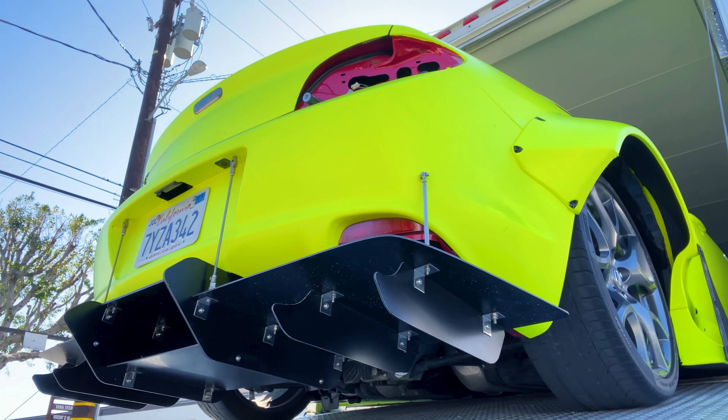Finally getting the air management system on the Brat Bunny. We are at Entice Motorsport to install the new AccuAir Endo-CVT system. Where's John at? There he is, he's running away.

There is actually a lot of electrical work in addition to the plumbing that needs to be done for the AccuAir Endo-CVT system. Instead of having your trunk be really messy with compressors and lines all over the place, this system by AccuAir is self-containing everything in the tank.

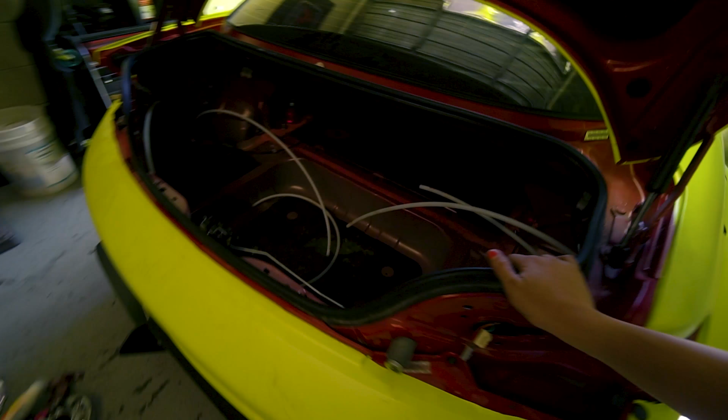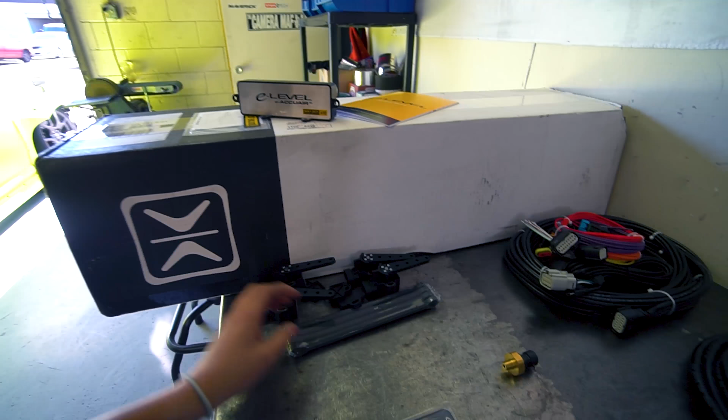We have temporary lines in right now. This is the big day that I've been waiting for. I did lay some of this stuff out already. We have our wiring here, the tubing for all the plumbing, some hardware fittings, our touchpad, and here are our height sensors. This is the ECU for everything, and this is the tank. So I actually got the 5 gallon over the 3 gallon. I measured my trunk and I had enough room, so I figured why not? And it's aluminum, our aluminum tank with the raw finish.

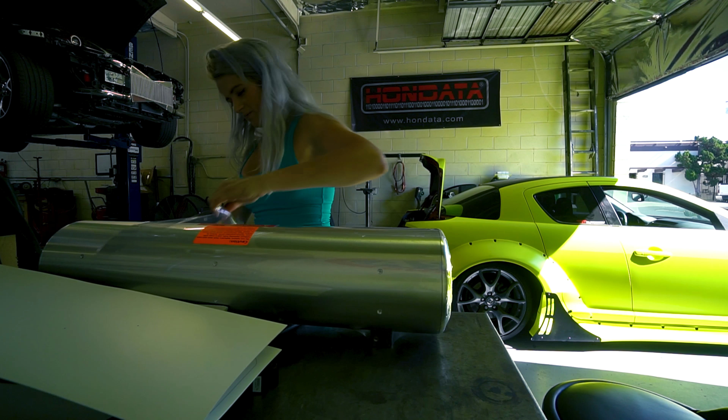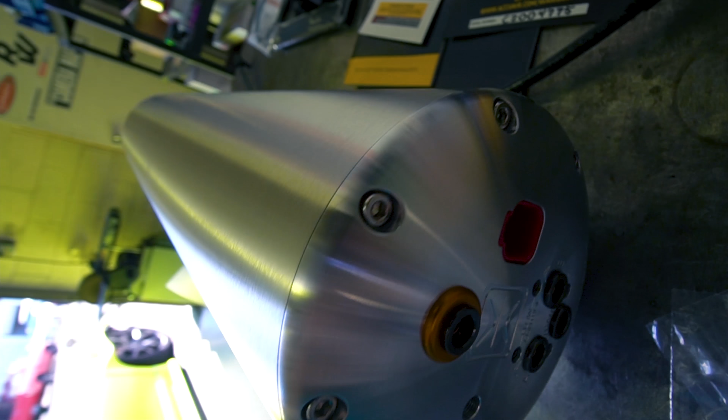Aluminum 5 gallon tank from AccuAir. This is their Endo-CVT. Everything is internal, which is amazing, and this is why the back of the car is going to look so much cleaner than the ones currently on the market. They usually have a lot more plumbing and wires coming out and the compressors externally. So this one has everything self-contained inside.

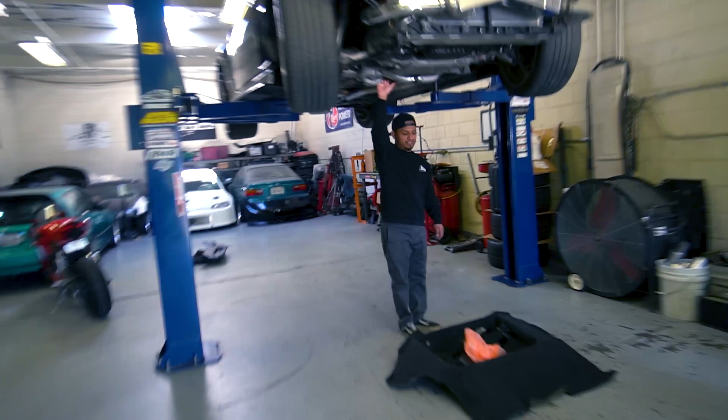So inside there are 2 Wabco compressors. You've done a couple of these, right? I've done a couple of them. I think I helped Dustin out with one, and then I helped a friend do one. They're pretty cool systems, I like it.

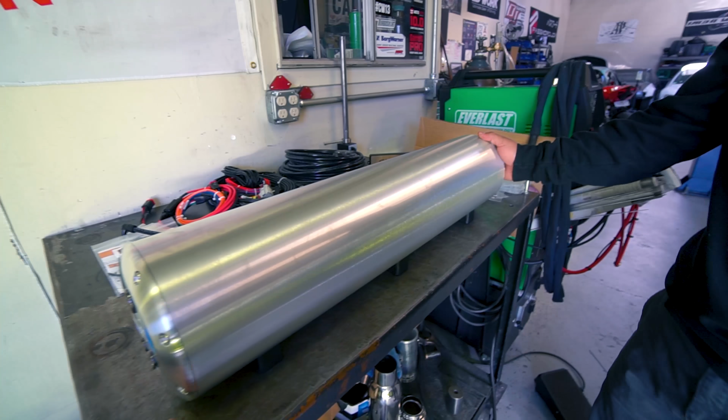There's wiring, there's plumbing, and then there's also mounting hardware with the E-level sensors, the height sensors. And getting everything to talk to each other. Dude, this system's awesome, it's really quiet. As opposed to the system I have in my car which is really annoyingly loud. These things are quiet as hell.

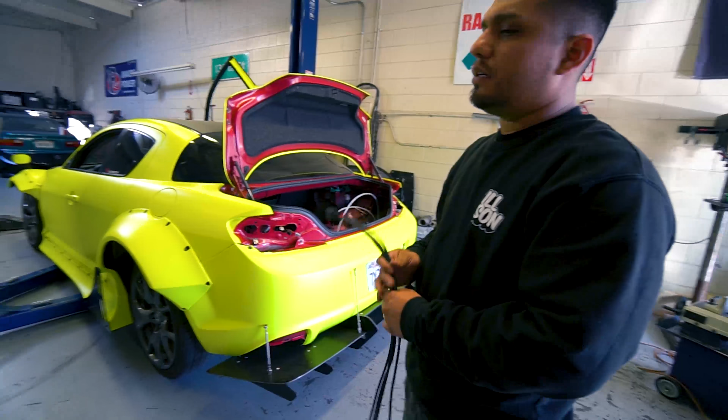Right now we're not going to worry about making anything look pretty, we're just going to lay out everything where it's supposed to sit. All right John, what are we doing? What are we starting with? Well, we're going to have to run this wiring for the height sensors. So, set up everything, all the wiring in the trunk, run it from the trunk to the front, to the rear, and just start working our way from there.

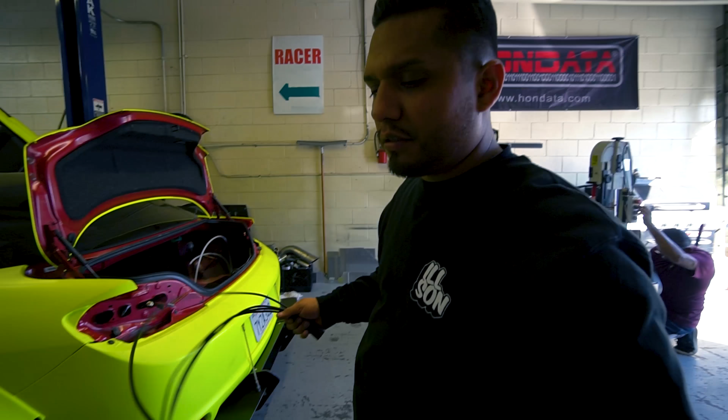We're going to be drilling a hole through here to route everything through so that it's routed evenly from each side. Damn.

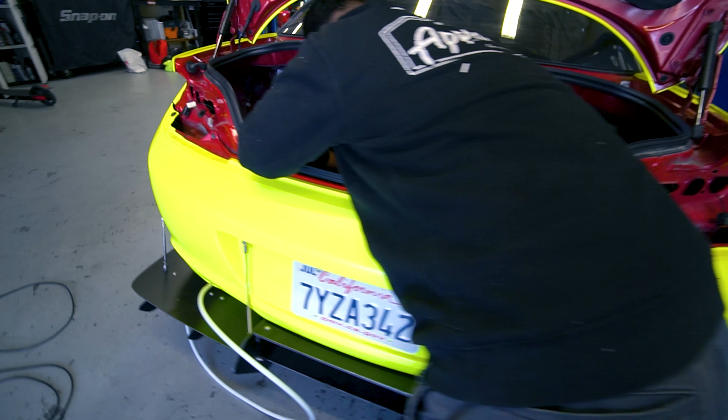I always say I don't really understand how there's not more girls working on cars because we can fit everywhere. I have small hands too. I don't get how guys do it sometimes. I know, I feel fat working in there.

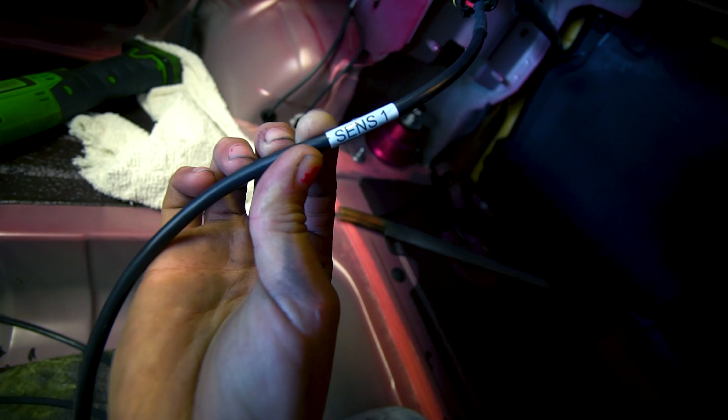That is all clean. Now I think John's going under the car and he's going to pull the wires through. The longer ones are going to the front because they have to travel further to the front of the car. The shorter ones are going to the rear, and they're all labeled on here as well. Sensor 1, then we have 2, 3, 4.

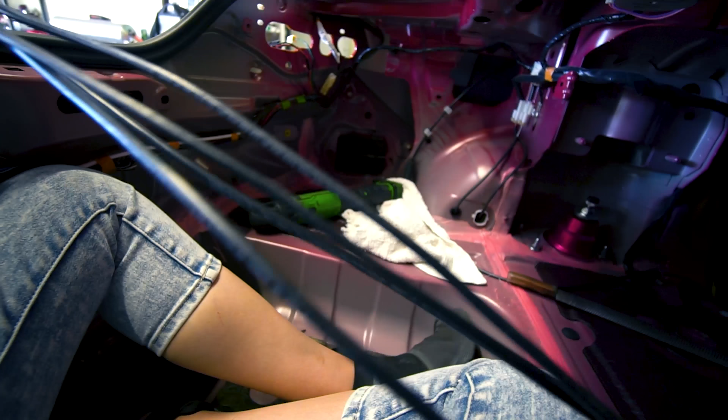It's just the height sensor wiring and the airline, those are going to be the only things you run underneath the car. Okay, everything else can be from in here, and the power wire straight to the front. Everything else, all the modules will be here. It's pretty simple, okay.

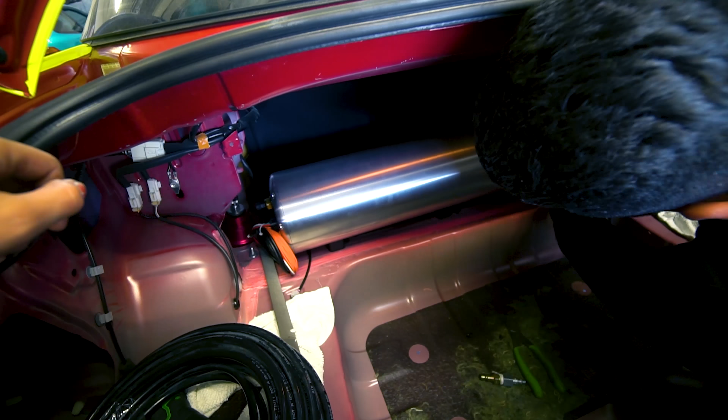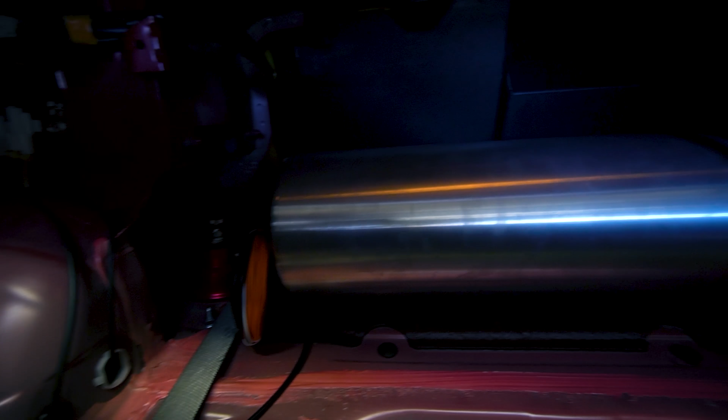This connects to the actual module itself, the little ECU type thing. And then that is hooked up to this, and it pretty much, you've got the left side of the car lines coming out here, and the right side of the car lines coming out here, the air lines. This just tells the module what each wheel height, what each shock height is. You've got your power wires here, and then all this goes to the module.

I still don't know what I'm doing with the trunk yet. I know eventually I'm going to put maybe some amps or subwoofers, something in the back, but I don't have any of that stuff yet. So at this point, the main goal is to just get everything mounted, the system installed, plumbed, wired, and working, and then eventually we'll move on to doing a full design for the trunk. But for now, the priority is just getting this working.

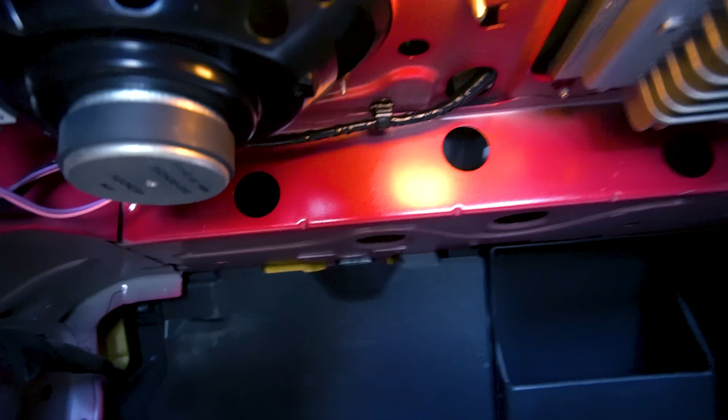We'll mount one here, it'll be there. And then we can even run the wire through here, through this hole, so you can't see it. And then we'll put the other module right here on the right side of that. I'm so glad the 5-gallon fits perfectly, like we're not even really pinched on each side, and that's the largest one. It just looks massive on the outside of the car, and then right when it's inside, it doesn't look as big anymore.

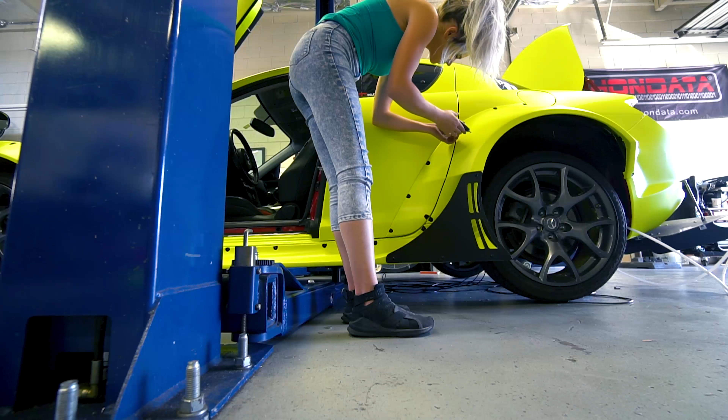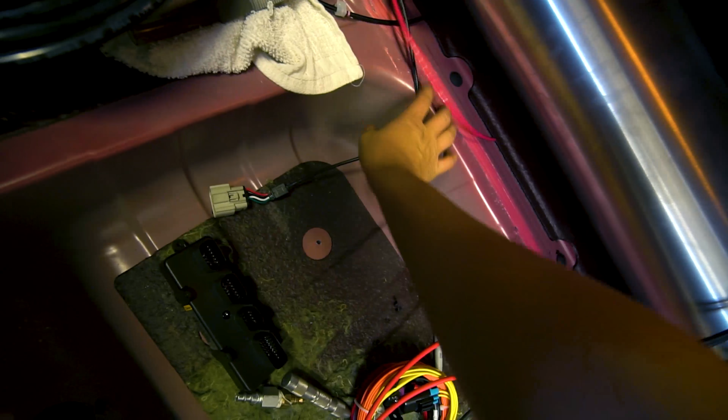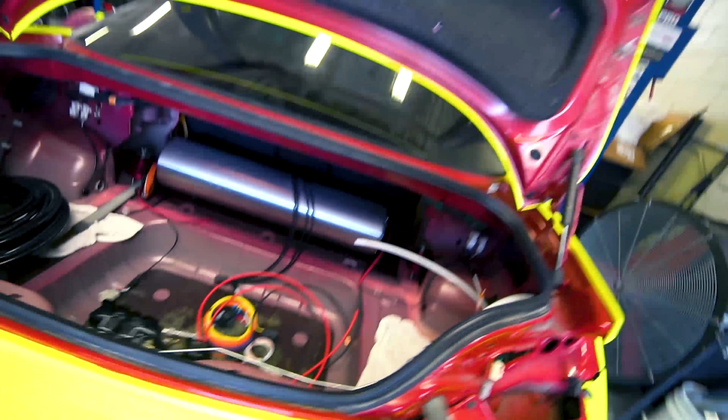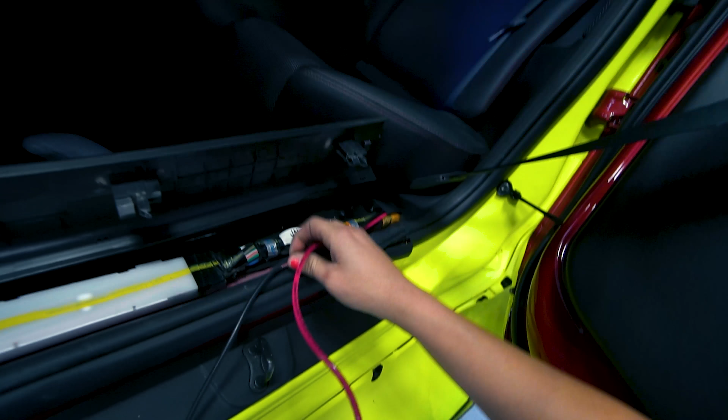We are running two wires to the front of the car through the side panel, pushing them through the back seat, down the side, and into here. One of them is the wire to the battery. The battery cable that came with the kit is a little too short, so we got some wire as an extension for it. This is the battery extension we're routing the same way as the wire for the touchpad. We're going to zip tie all of this, following it all the way up. The battery wire goes to the battery, and the touchpad wire routes up here and through the center.

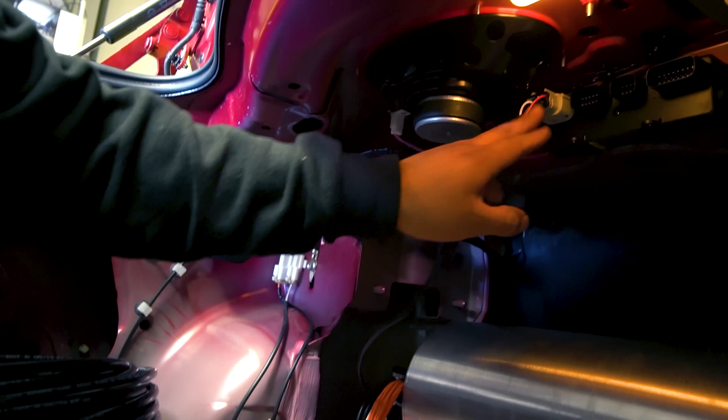The plug for the touchpad goes all the way on the left. The plug for the height sensors is the second one.

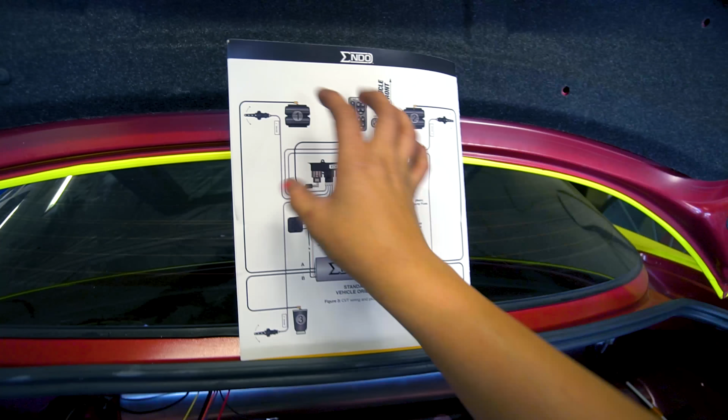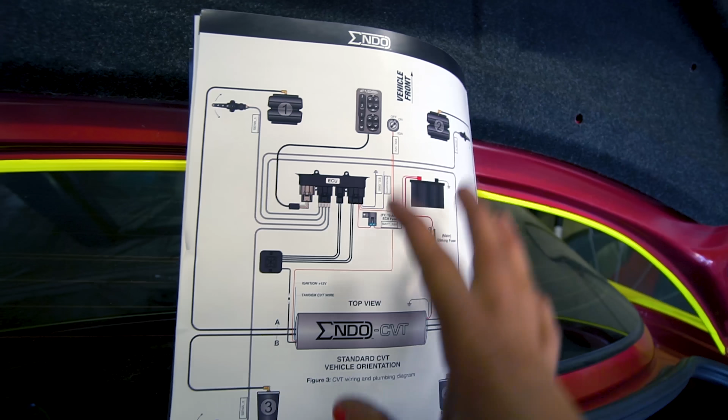The next thing we're doing is laying out all of the plumbing and wiring. That's the plumbing for the actual air struts in all four corners, and the height sensors as well in all four corners. All of that needs to be routed individually. Right now we're just lining this up and mocking it up, not fully installing it. The only place we're fully installing it is at the tank, so at least the tank will keep everything organized, and we can zip tie it at the end here before making the final connections. That's our plan of attack for the airline. For the height sensors, pretty much the same thing—we're laying out the path through the car, not fully installing it at the height sensor, but zip tying it for now to get it in the right place. So we have the four wires right here: one and two go in the front, and three and four go in the rear. They're all going through the hole we made initially, so everything is plumbed through there.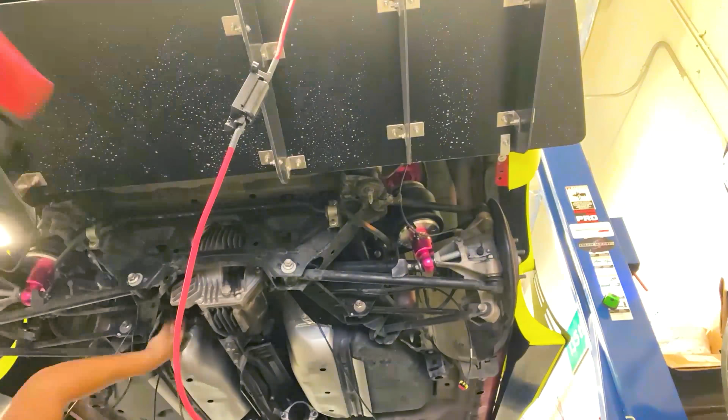Now we're starting on plumbing the air line, really just routing everything.

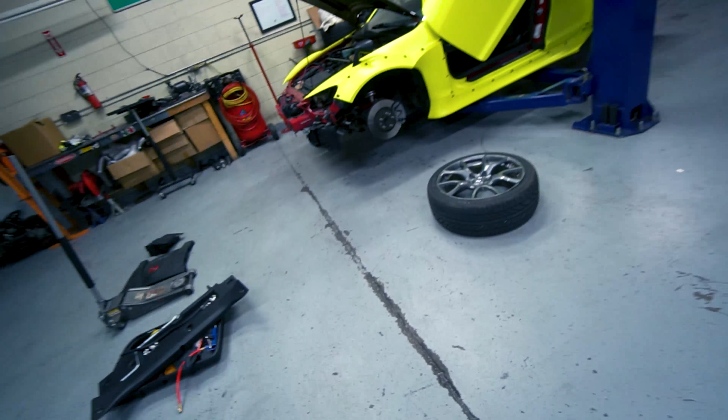What'd you do that for? I wasn't ready—Gibby, take over vlog. Holy shit, Collette, this lighting makes you look so buff. Oh shit, how we look like in the restaurant. Damn, that's how we be looking in the camera, huh? Dirty mirror, but it's cool. Okay so, this is what we do here. Alright, how do you stop this? It don't ever stop, Gibby. It don't ever stop. Oh, that was good. Bro, get this, I have three people. Get this, get this, get this, get this, look, I'm about to win. Yeah bro, I'm about to win. Yeah bro, yeah? Brawl Stars, beat me. Bet you can't, bet you can't. Whose jacket is this? Mine. No, sorry.

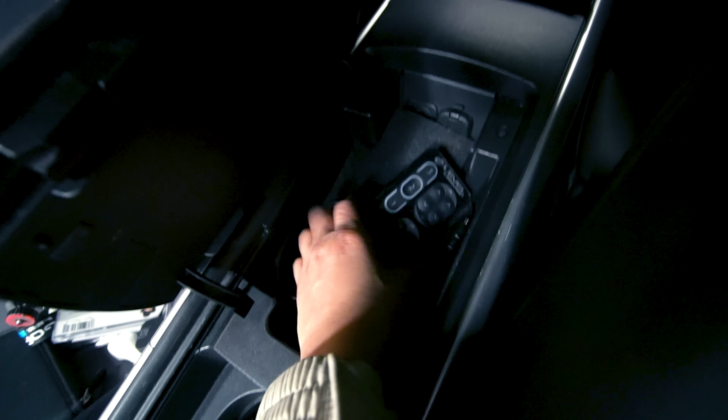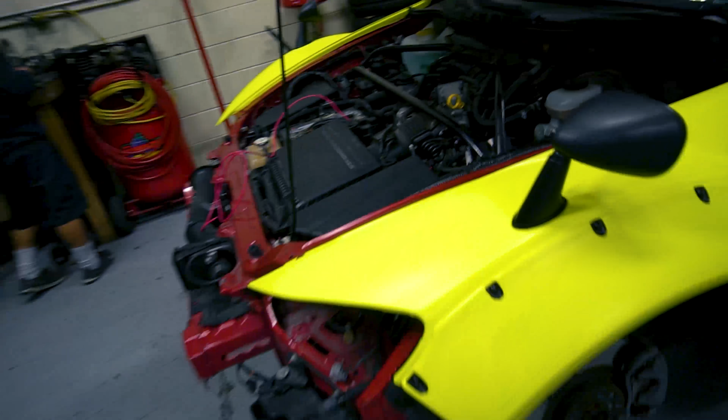Dre finished routing the wire for our touchpad. It's covered up now, but it continued down here, went under the carpet, and got its own little area right in here. That's taken care of, which is awesome. Now we're just finishing up wiring the battery cable—again, this is the one we had to extend. Now we're just going to fish this to the terminal.

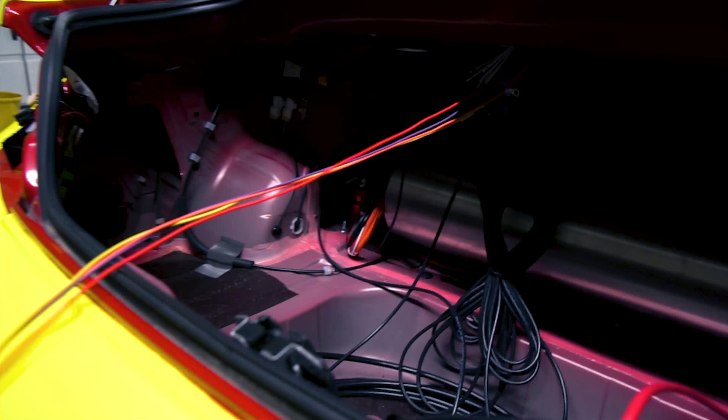The purple wire is hooked up to your dome light, so every time you open your door, it turns on the remote. The little remote turns on—it's kind of like when you open your door, the light turns on, and then it shuts off. It does that.

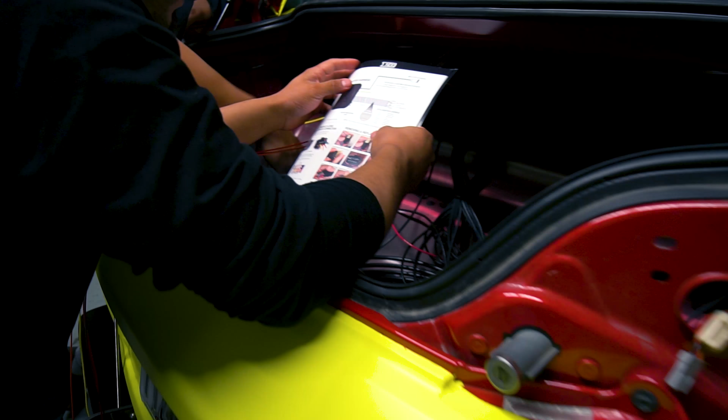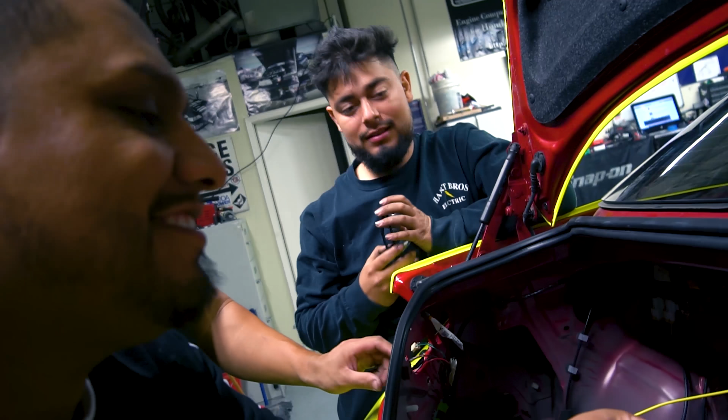What's happening now? What's happening is we're doing all the wiring. Gil here got his heart broken. John? Wow, some little Philly broke his heart. Gibby, no—he's like, I'm over her already. Yeah, don't worry, you'll be in Vegas soon. What are you trying to tell me, John? Just say it, dude, you know. It's okay to fall in love in Vegas, you know.

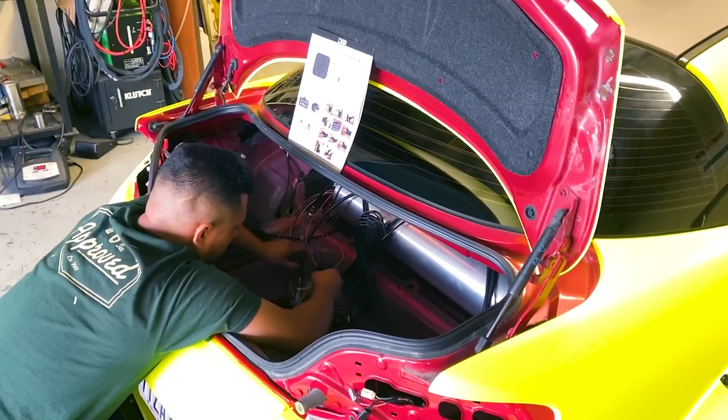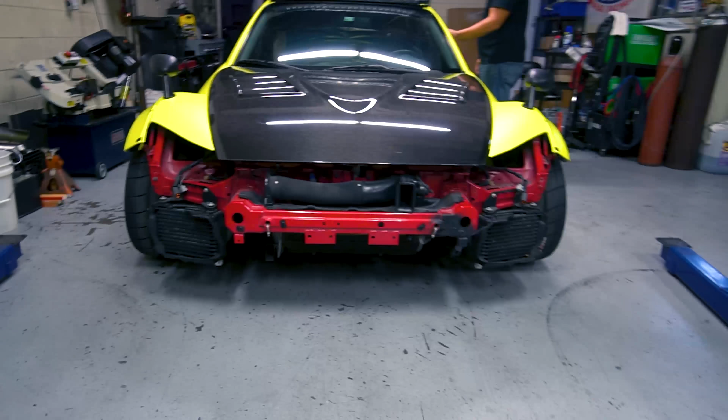It's time for the ultimate test. Everything is wired up, plumbed, routed, resecured, and ready to go. This is our touchpad here. We did not have time to install the height level sensors, so that's the only thing not done yet, but the system works without that—you just control each side manually with the touchpad. Oh my gosh, I am so excited. All right, let's go. Oh snap! Hit the front view, let's hit the front view. Oh my gosh. Yeah, dang.